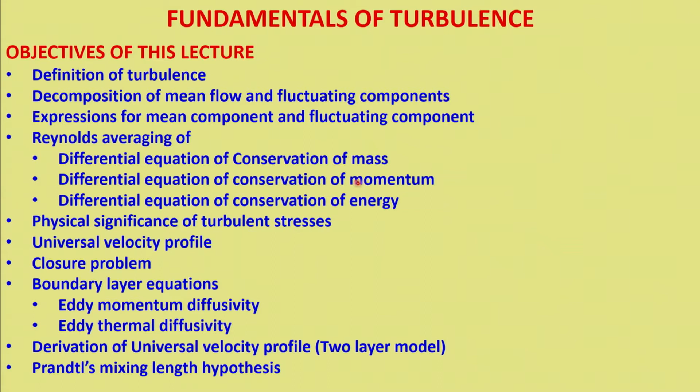Hello everyone. Yesterday we had just started off with the definition of turbulence, decomposition of mean flow and fluctuating components. Expressions for mean flow and fluctuating components were given, and we had Reynolds averaged the conservation of mass and momentum. So today we will do conservation of energy.

Before I do that, let's just take a quick look at these governing equations which had no simplifications, that is conservation of mass, 3 momentum equations and 1 energy equation.

The left hand side is the inertia force, this is the pressure force, these are the viscous forces, and Fx is the body force. So du by dt is the total acceleration, that is del u by del t plus u del u by del x plus v del u by del y plus w del u by del z. Now if I take incompressible flow, this term, that is mu by 3 times del u by del x plus del v by del y plus del w by del z, will become 0.

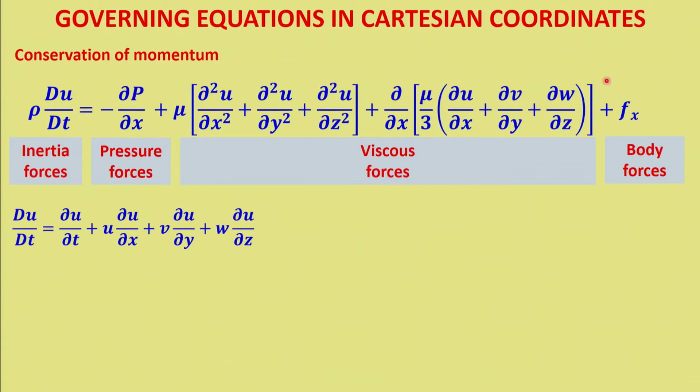So then this is the conservation of energy. You have the total derivative of temperature on the left hand side, which is the convection term, and then the conduction term, pressure work and viscous dissipation. Pressure work and viscous dissipation get neglected if we consider incompressible flow. So we end up with only rho Cp dT/dt equal to k times del square T by del x squared plus del square T by del y squared plus del square T by del z squared.

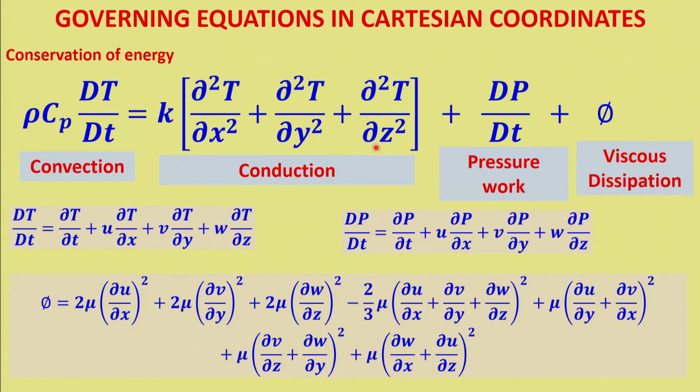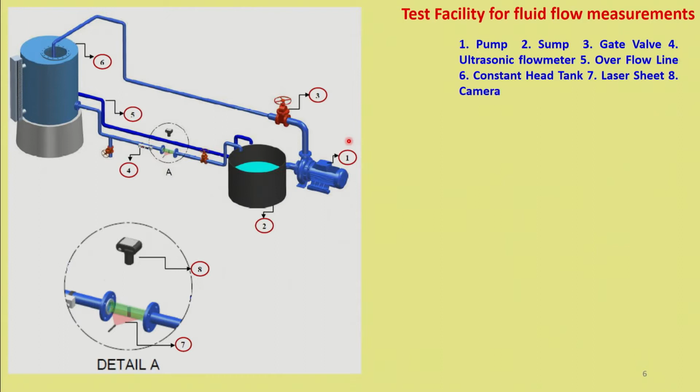So we said, okay, this is the Reynolds experiment where 2100 is the critical Reynolds number, and I showed you the video about the dissipation of the eddies downstream a circular cylinder and the trapezoidal cylinder, and I gave you the desirable situations of turbulent and laminar flow.

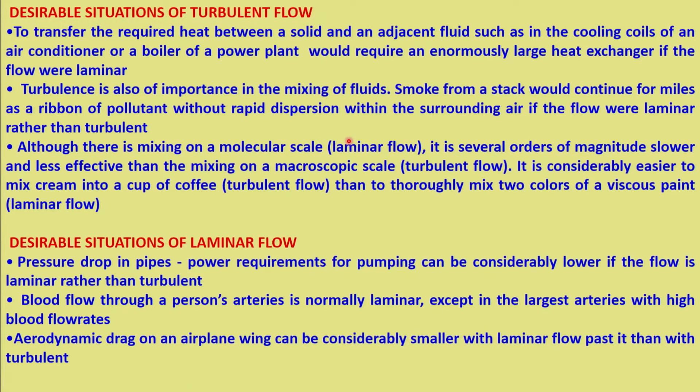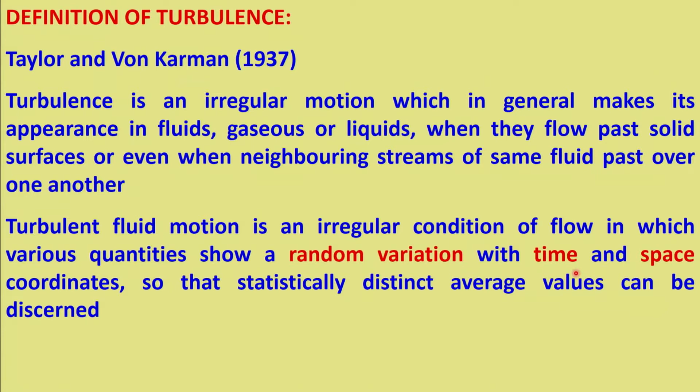This was the definition of turbulence given by Taylor and von Karman, which said that turbulent motion can be considered as an irregular condition of flow in which various quantities show a random variation with time and space, which enables us to give statistically distinct average values.

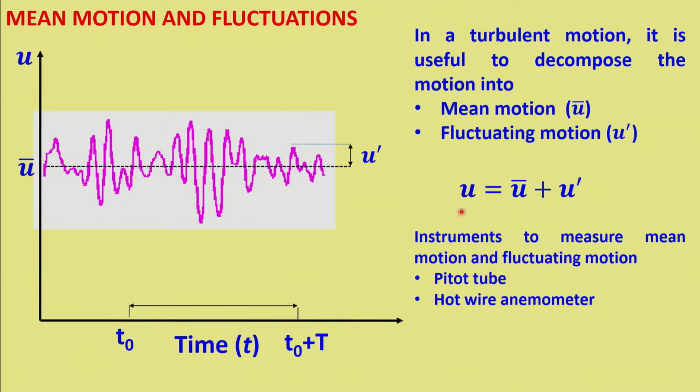So then we decomposed the motion into mean motion and fluctuating motion, that is u equal to u bar plus u prime, and u bar definition is 1 by T integral of u dt within the limits t naught to t naught plus T. We found that u prime bar is equal to 0, so it doesn't help us. So we defined, to quantify the fluctuating component, we squared it and then averaged it, that is u prime squared bar. It is kind of a standard deviation if I have to tell you.

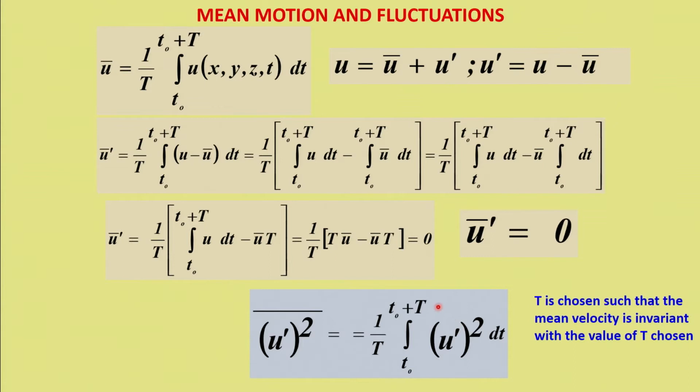So u prime squared bar exists, and then we define turbulence intensity as the square root of u prime squared bar upon u bar into 100, that is the turbulence intensity, and we derived relations for u and v, and these were the rules which were stated without derivations.

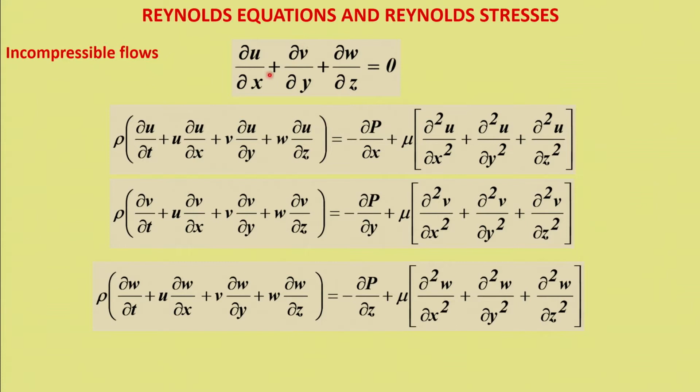We took the incompressible flow continuity equation and the x momentum equation, and we time averaged the continuity equation. We got del u bar by del x plus del v bar by del y plus del w bar by del z equal to 0, and then we did the Reynolds averaging of the momentum equation by rearranging this equation.

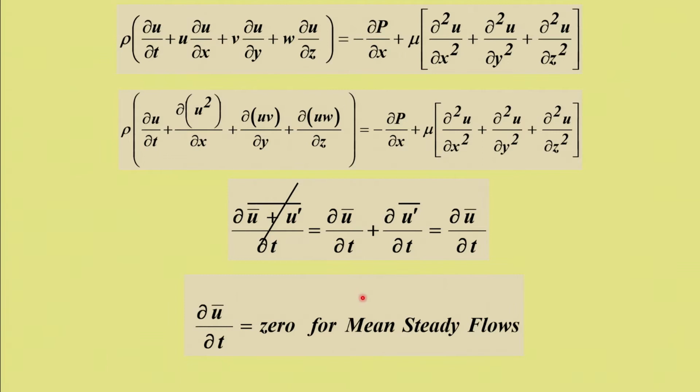We got that del u bar by del t equal to 0 because we are considering mean steady flow, and then we Reynolds averaged term by term, that is we took del u squared bar by del x, del uv bar by del y and del uw bar by del z, and we found that we got extra terms, that is del u prime squared bar by del x, del u prime v prime bar by del y and del u prime w prime bar by del z.

Similarly for pressure we got del p bar by del x, and for viscous terms mu del squared u bar by del x squared, del squared u bar by del y squared, del squared u bar by del z squared. So similarly we extended this for the x, y and z momentum equations. So you have these additional terms, we pushed them to the right hand side.

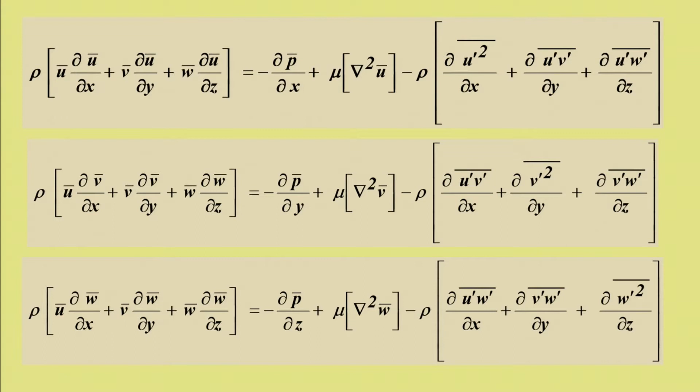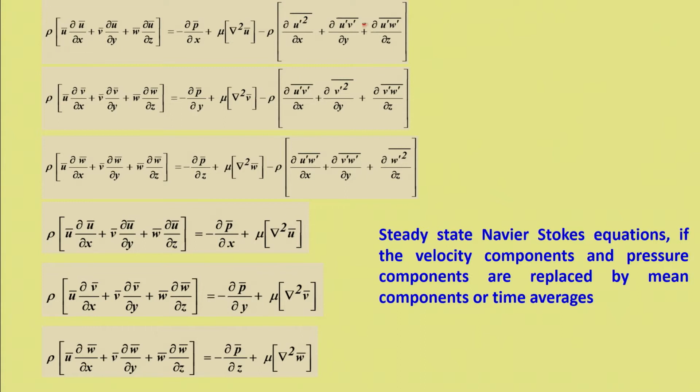These 9 additional terms can be visualized as the extra normal and shear stresses. So these are the equations which you get by Reynolds averaging. Without Reynolds averaging, these were the terms we had.

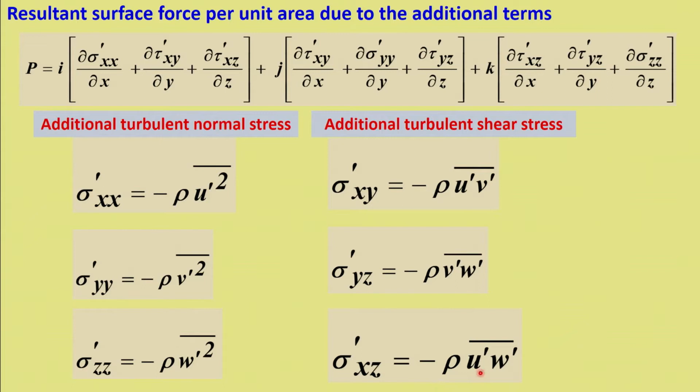These stresses are the 3 normal stresses, that is minus rho u prime squared bar, minus rho v prime squared bar, minus rho w prime squared bar, and shear stresses as minus rho u prime v prime bar, minus rho v prime w prime bar, minus rho u prime w prime bar. So then these are the additional stresses which are called Reynolds stresses.

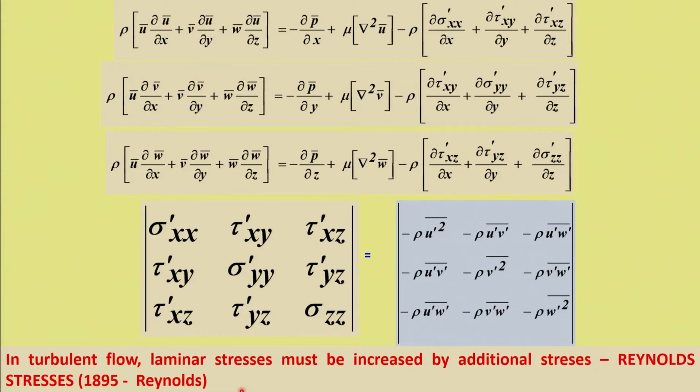So although these stresses appear with a negative sign, positive u prime induces negative v prime, and positive v prime induces negative u prime. So you get tau xy actually as positive. So this is over and above our viscous shear stress, that is mu del u bar by del y.

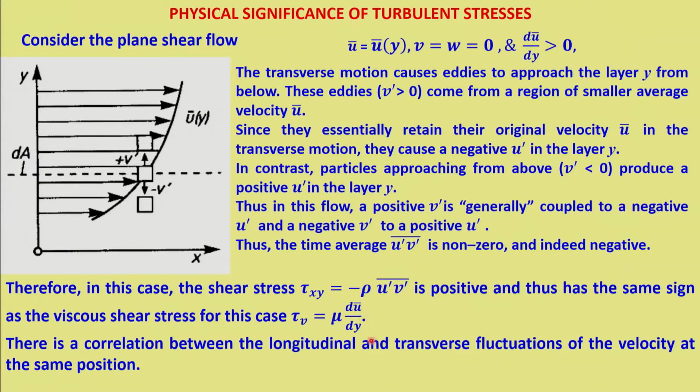So this was the physical significance of the turbulent stresses, and then we said that the total shear stress is equal to tau laminar plus tau turbulent, that is mu del u by del y minus rho u prime v prime bar. So in laminar boundary layer, minus rho u prime v prime bar is 0 because u prime is 0 and v prime is 0.

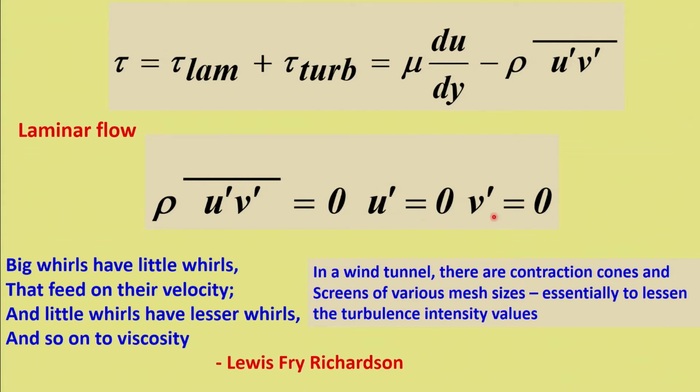So then we introduced a universal velocity profile, and we said that there are 3 layers: viscous sublayer, overlap layer, and outer layer. This is the flow in a pipe. In the viscous sublayer, laminar shear stress is larger than turbulent shear stress; in the overlap layer, both laminar and turbulent shear stresses are of the same order; and in the turbulent layer, laminar shear stress is lower than turbulent shear stress.

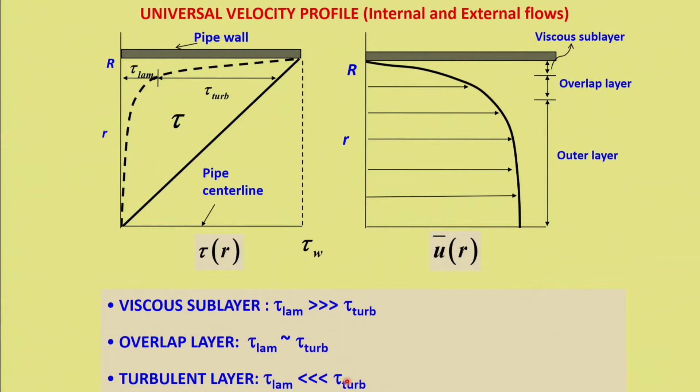So then we said the viscous sublayer can be represented with u plus equal to y plus, less than 5, and overlap layer u plus equal to 5 log of y plus minus 3.05, for y plus between 5 to 30, and turbulent layer is u plus equal to 2.5 log of y plus plus 5.5 for y plus greater than 30, and u plus is nothing but u by u tau.

U tau is frictional velocity. We showed yesterday that the unit of u tau reduces to meters per second, and y plus is y u tau by nu. We showed that this is non-dimensional. So this is called universal velocity profile.

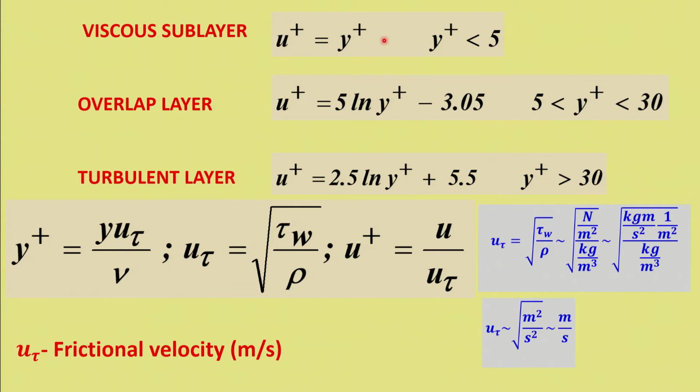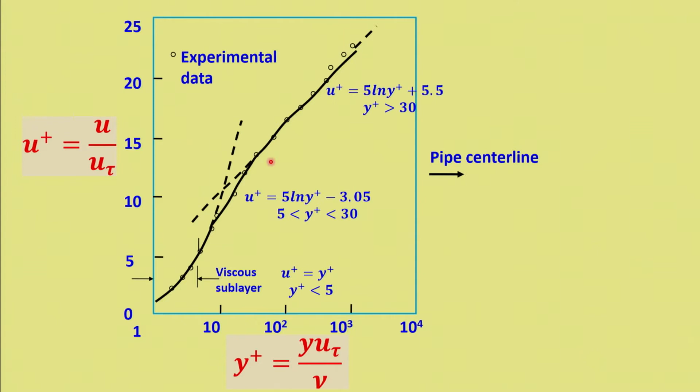Why is it called universal? Because it is valid not just for external flows but also for internal flows. However, it is not valid for jet flows. We need to remember that this is only valid for internal and external flows, so this is kind of semi-empirical. If you compare the viscous sublayer, the buffer layer, and the turbulent layer, they are all matching with the experimental data. Today in one of the modules we are going to derive this u plus, or the universal velocity profile.

So now let us do the time averaging of the energy equation.

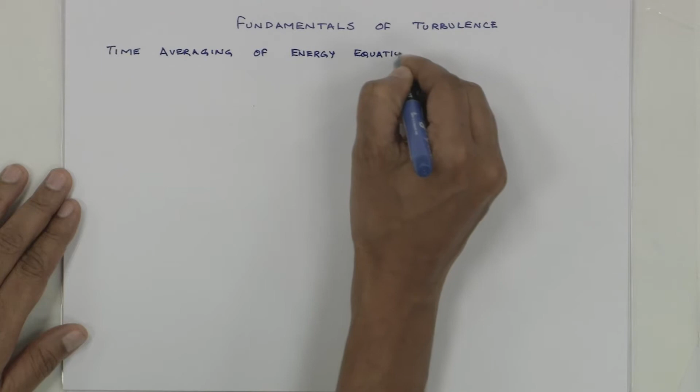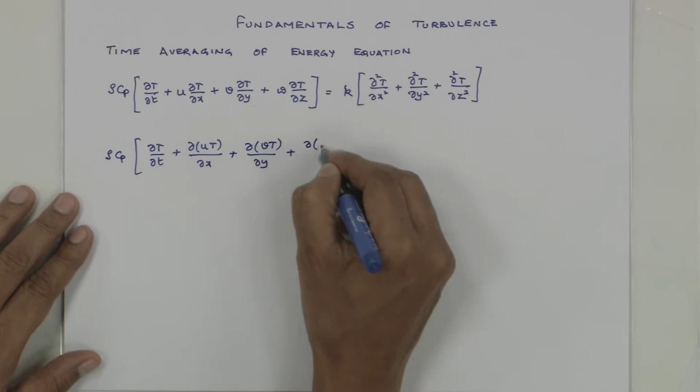So I am having only the total derivative of temperature and the conduction term. Let us write rho Cp del T by del t plus U del T by del X plus V del T by del Y plus W del T by del Z is equal to K into del squared T by del X squared plus del squared T by del Y squared plus del squared T by del Z squared.

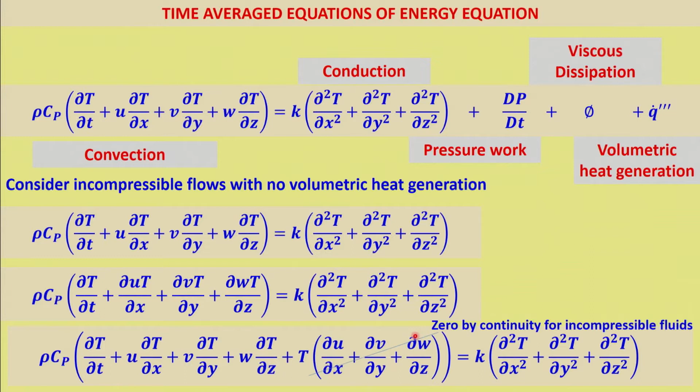Like we did in the momentum equation, we shall rearrange the left hand side so that time averaging becomes easy. So rho Cp del t by del t plus del of ut by del x plus del of vt by del y plus del of wt by del z is equal to k del squared t by del x squared plus del squared t by del y squared plus del squared t by del z squared. If I show the slides and expand this, you get the total derivative of t, plus t times del u by del x plus del v by del y plus del w by del z. This term gets 0 by continuity, because we are considering incompressible flow. So this is the same as what we have written at the top.

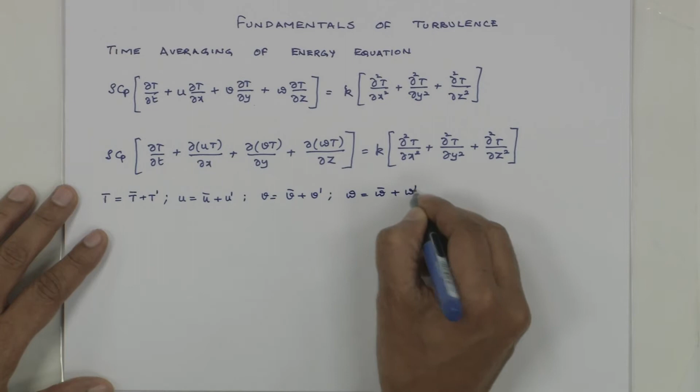So let us take up each term and see how it gets time averaged. First term: del of t bar plus t prime bar by del t equal to del t bar by del t plus del t prime bar by del t. This second term is 0, because t prime bar equals 0. So you get del t bar by del t.

Now the next term: del of u bar plus u prime times t bar plus t prime bar, upon del x. So you get del of u bar t bar plus u prime t bar plus t prime u bar plus u prime t prime bar, upon del x.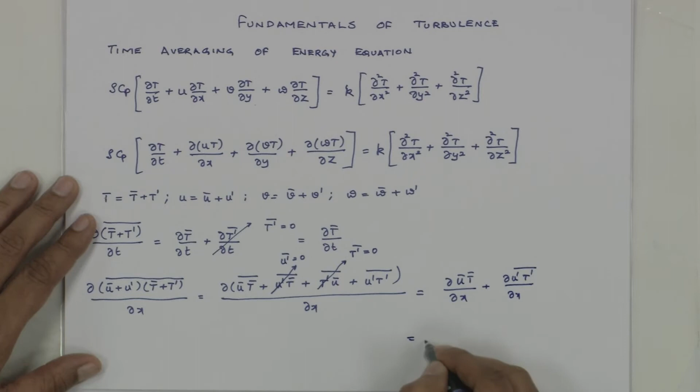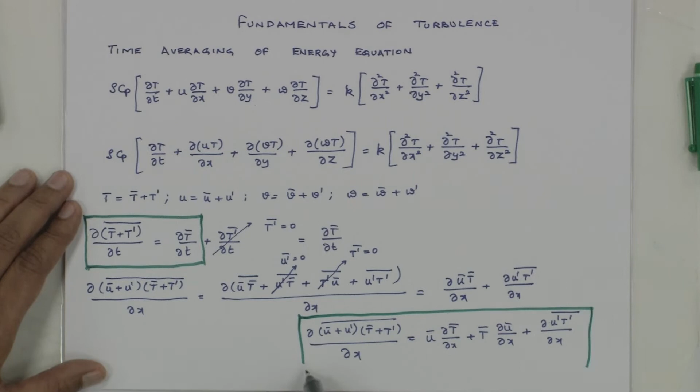As shown yesterday, this term will be 0 because u prime bar is 0, and this term will be 0 because t prime bar is 0. So you get del of u bar t bar upon del x plus del of u prime t prime bar upon del x, that is nothing but u bar del t bar by del x plus t bar del u bar by del x plus del u prime t prime bar upon del x. This is del u bar plus u prime t bar plus t prime bar upon del x. So I have found del of t bar plus t prime as this first term, and this is my second term. Now let us take up the third term.

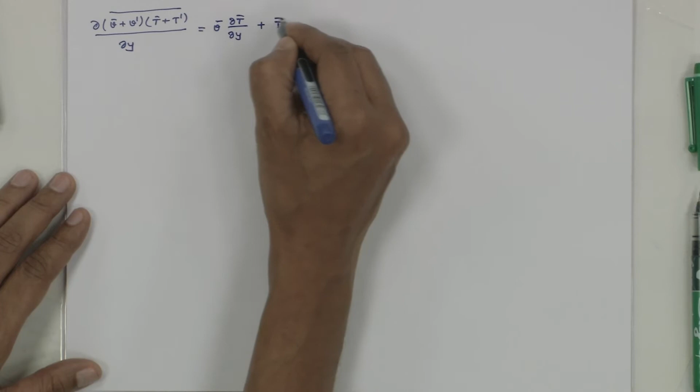Third term I can directly write, that is del of v bar plus v prime into t bar plus t prime bar upon del y, equal to v bar del t bar by del y plus t bar del v bar by del y plus del of v prime t prime bar upon del y.

Del of next term w bar plus w prime t bar plus t prime bar upon del y is equal to w bar del t bar by del y plus t bar del w bar by del y plus del w prime t prime bar by del z, this is not del y, this is del z, del z, del z.

Now the right hand terms, you have del squared t bar plus t prime bar by del x squared, you get del squared t bar by del x squared plus del squared t prime bar by del x squared. This is 0 because t prime bar is 0. So you end up getting del squared t bar plus t prime is equal to del squared t bar by del x squared.

Similarly, del squared t bar plus t prime bar by del y squared equal to del squared t bar by del y squared, and del squared t bar plus t prime bar upon del z squared is equal to del squared t bar by del z squared.

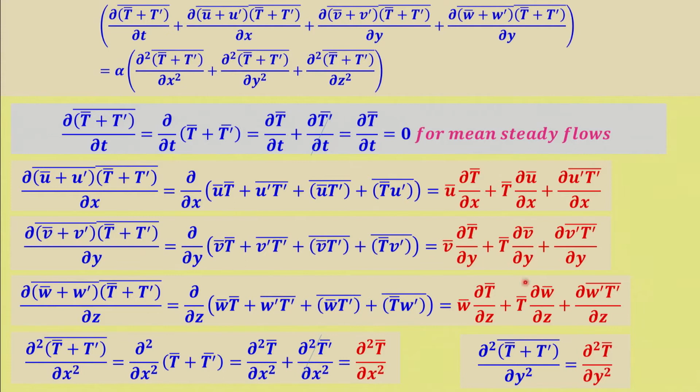So just if you see the slides here for a minute, back to slides, each term I have written here, each of these terms I have expanded and written.

If we substitute all of this into my energy equation, I get rho Cp into del T bar by del T plus U bar del T bar by del X plus T bar del U bar by del X.

I am taking T bar common and write del U bar by del X plus del of U prime T prime bar upon del X plus V bar del T bar by del Y plus T bar del V bar by del Y plus del V prime T prime bar by del Y plus W bar del T bar by del Z plus T bar del W bar by del Z plus del by del Z of W prime T prime bar.

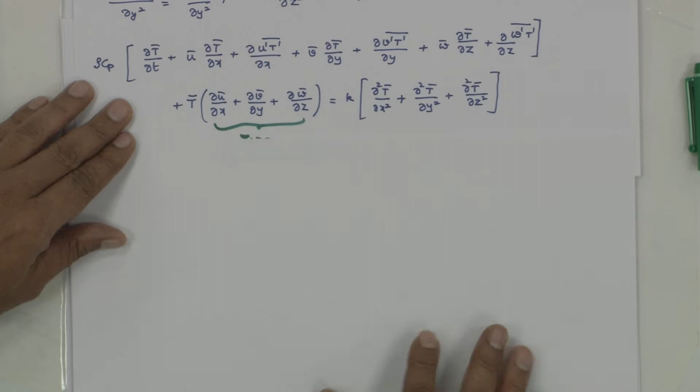I will push all these turbulence parameters to the right hand side like I did in the momentum equation. So U bar del T bar by del, and also I am considering mean steady flow. So for mean steady flow, del T bar by del T is 0. So I can neglect this and I will push this rho Cp to the right hand side.

So I get U bar del T bar by del X plus V bar del T bar by del Y plus W bar del T bar by del Z is equal to alpha del squared T bar by del X squared plus del squared T bar by del Y squared plus del squared T bar by del Z squared.

Minus, because I am pushing this to the right hand side, if I take minus as common, del U prime T prime bar by del X plus del V prime T prime bar by del Y plus del of W prime T prime bar by del Z.

You see, these were the terms earlier which were there, but now this is the additional stresses. You can think of additional stresses which are going to aid, like turbulent shear stress. These are going to get additional heat flux. They are going to contribute for additional heat flux.

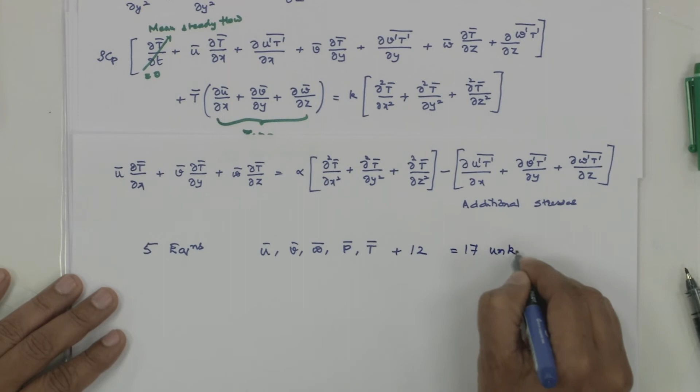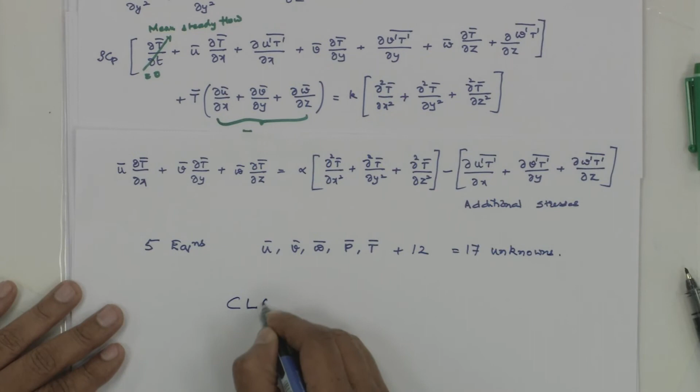Fortunately, the gap between the equations and the unknowns is not so menacing, because if we consider a few simple flow configurations, such as boundary layers and fully developed flow through straight ducts, we can get slightly closed form solutions.

So what we shall do now is write the boundary layer equations. If I take the continuity equation in the boundary layer, let us write down the boundary layer equations. So the next topic we are starting is boundary layer equations.

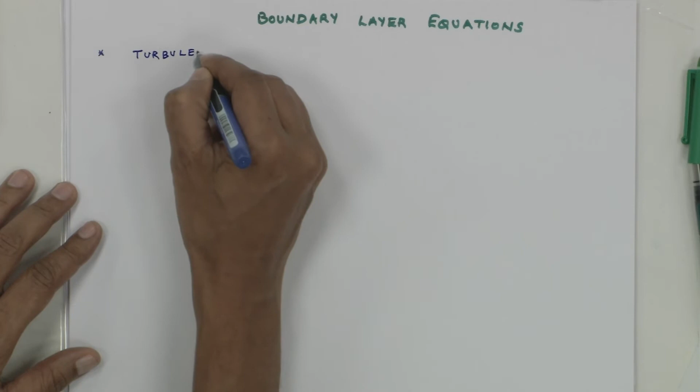In these boundary layer equations, what we are considering is turbulent flow near a wall parallel to a free stream u infinity and t infinity, oriented in the positive x direction, that is flow over a flat plate. So we are considering turbulent flow with velocity u infinity, t infinity in the positive x direction.

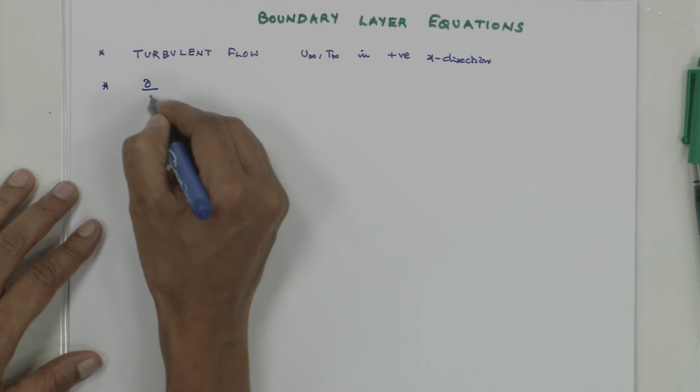Now, although the actual turbulent flow is 3-dimensional, from symmetry, the terms representing del by del z vanish and do not exist.

Next, as in laminar flow, the y momentum equation is neglected. We have argued this during the boundary layer equations in laminar flow. If you have doubts, please revisit those modules and convince yourself why the y momentum equation is neglected. And z momentum does not exist. So with this, what do we get?

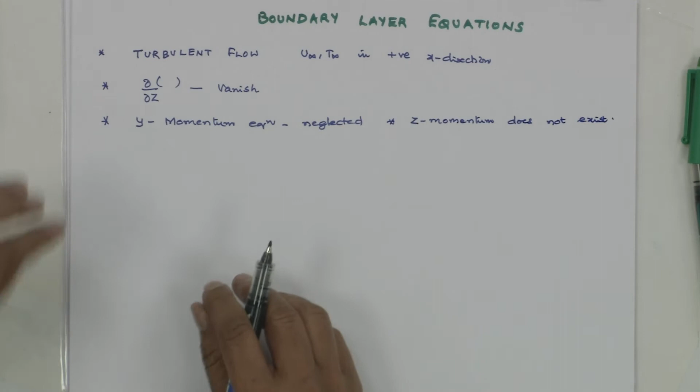The continuity equation would be del u bar by del x plus del v bar by del y equal to 0. That is my continuity equation.

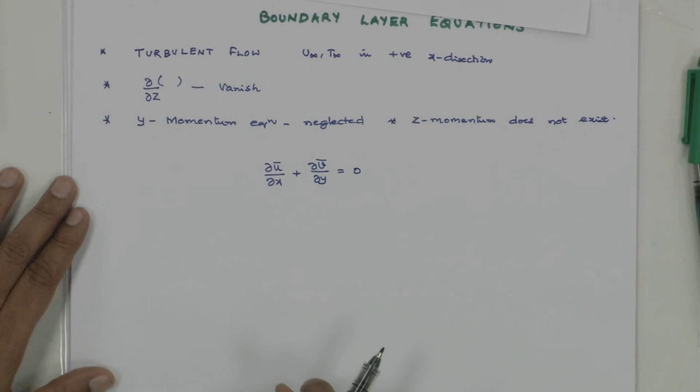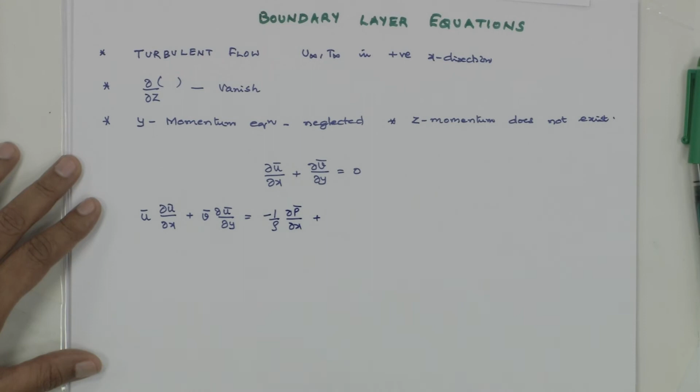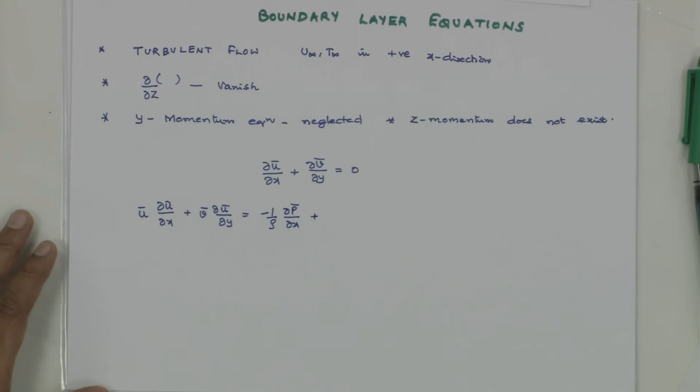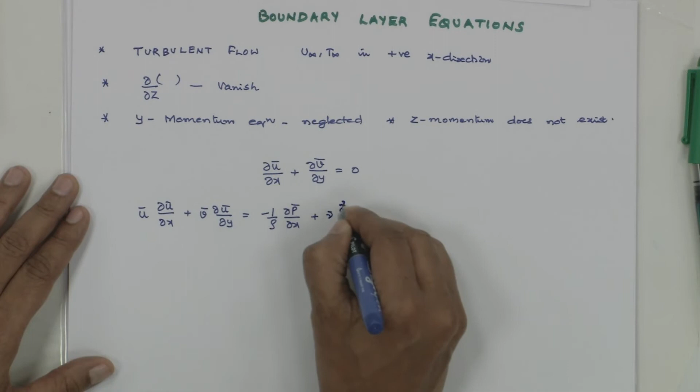Now, if we take the momentum equation which we derived, going back to the previous slide, here you see w bar is not there and the del by del z term is not there. So you get u bar del u bar by del x plus v bar del u bar by del y equal to minus 1 by rho del p bar by del x, plus, among the viscous terms x and z, z doesn't exist, and the scale of x is greater than the scale of y, so you get only nu del squared u bar by del y squared. This we have done in boundary layer equations.

Similarly, we say that del u prime v prime bar upon del y is greater than del u prime squared bar by del x. The del by del z term is not there. So I get only plus minus del of u prime v prime bar upon del y.

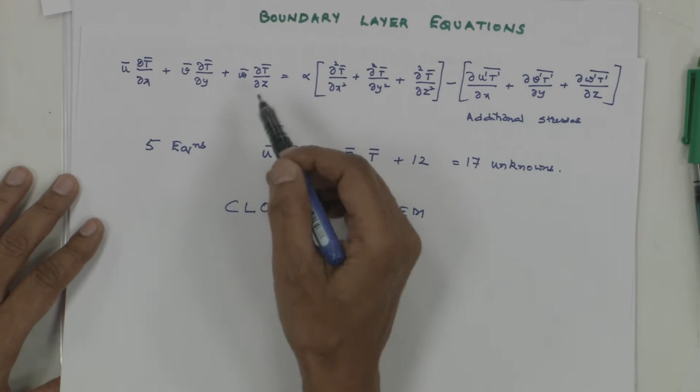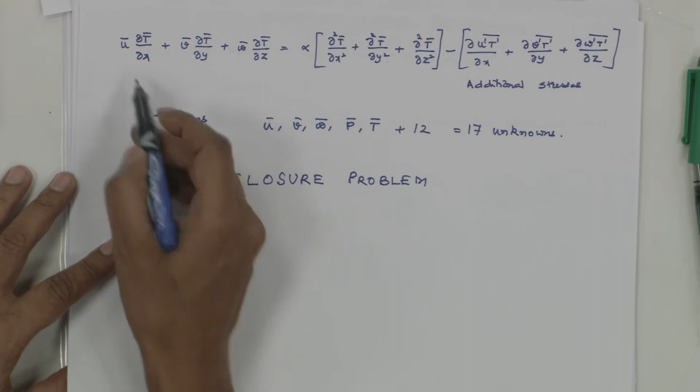Now let us take up the energy equation. This is what we had written, the time-averaged energy equation. Here W bar doesn't exist and del T bar by del Z doesn't exist. So on the left hand side you have only U bar del T bar by del X plus V bar del T bar by del Y. Let's write that: U bar del T bar by del X plus V bar del T bar by del Y

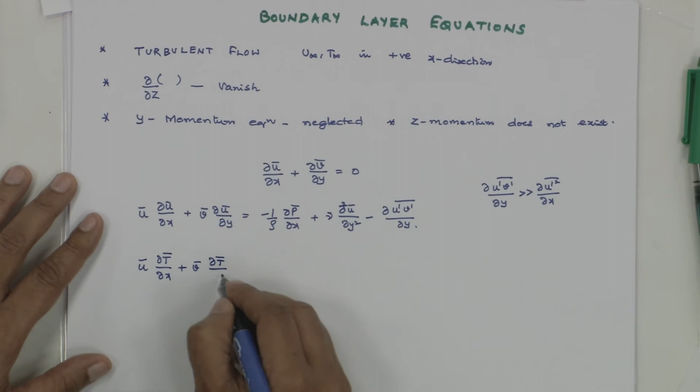is equal to alpha del squared T bar by del X squared plus alpha del squared T bar by del Y squared. You see, X is of the scale of L and Y is of the scale of delta, this is what we had taken. So delta T is very much smaller than L, so this term will vanish and only this term will remain, and the del by del Z term anyway is not there.

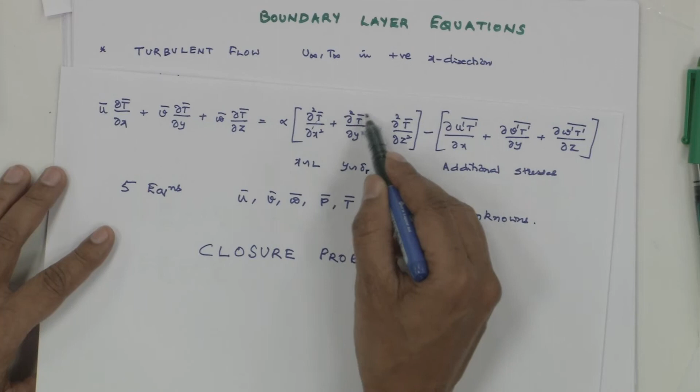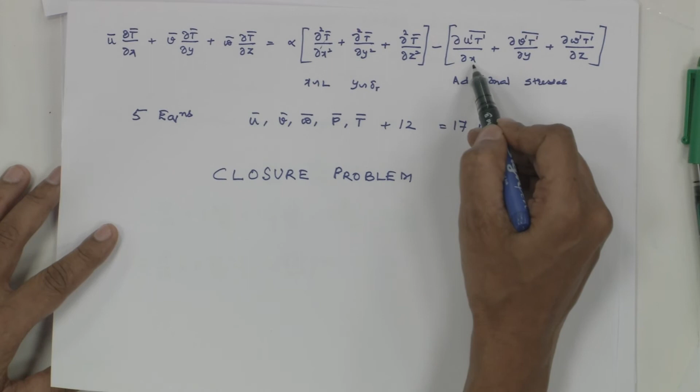So you have alpha del squared T bar by del Y squared minus of, now we have three terms. Out of these three terms, del by del Z term is not there. Out of these two terms, this is smaller than this, that is del of U prime T prime bar upon del X is less than del of V prime T prime bar upon del Y. So I will be left out with only del of V prime T prime bar upon del Y.

Okay, so if I get back to slides, these are the three equations which I have gotten, and these we are writing as our boundary layer equations.

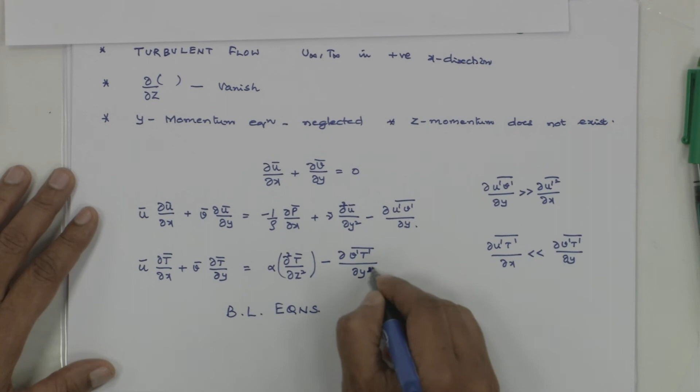Yes, del Y squared. There is a typo here, please correct it. This is, sorry, this is del Y, this is del Y squared. This is correct. If you get to the slides, what I have written here is wrong. So here this is del squared T bar by del Y squared minus del V prime T prime bar by del Y.

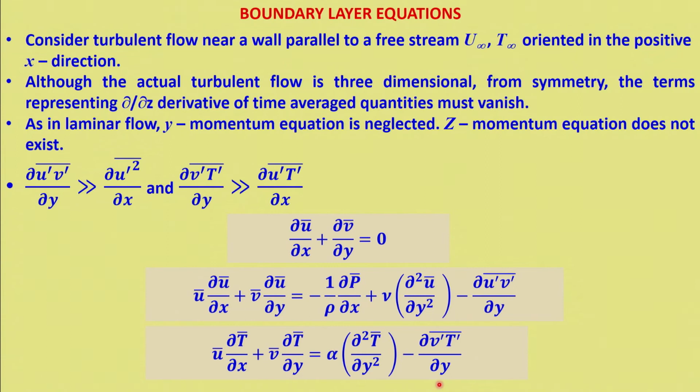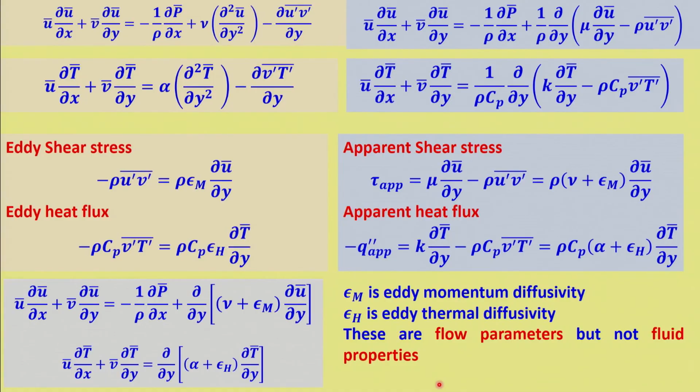Now I am going to introduce something called eddy diffusivity, momentum and thermal diffusivity. Let us write these equations a little differently.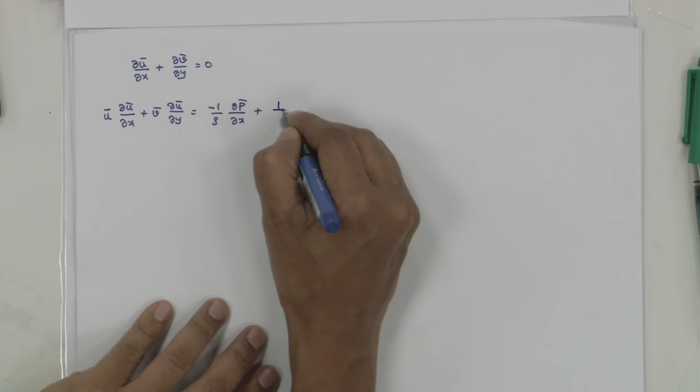So I will focus only on, let's write del U bar by del X plus del V bar by del Y equal to 0, continuity is over. The momentum is U bar del U bar by del X plus V bar del U bar by del Y equal to minus of 1 by rho del P bar by del X plus, you see in this equation what I am doing is, I am taking 1 by rho del by del Y of, I am writing. So 1 by rho del by del Y into mu del U bar by del Y minus of rho U prime V prime bar.

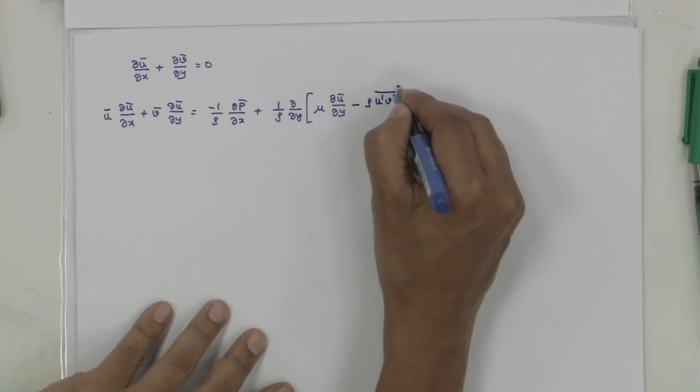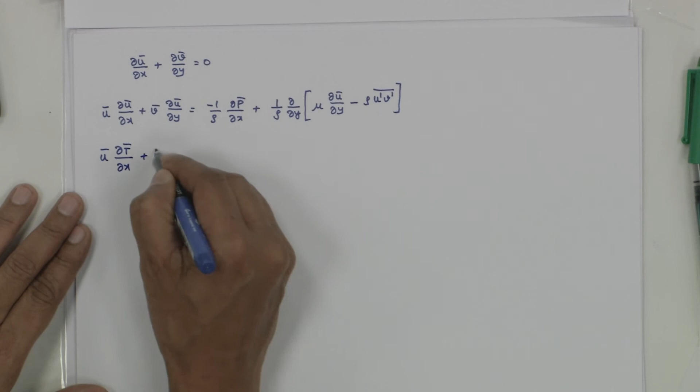Similarly, the energy equation, U bar del T bar by del X plus V bar del T bar by del Y is equal to 1 by rho Cp del by del Y of K del T bar by del Y minus rho Cp V prime T prime bar.

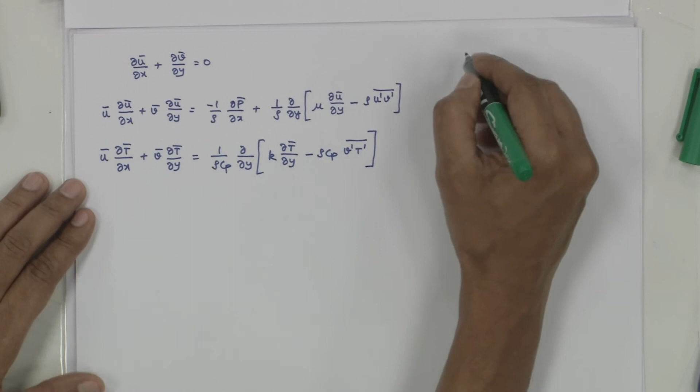Now I define what is called eddy shear stress, that is minus rho U prime V prime bar. You see here mu del U bar del Y is a shear stress. So minus rho U prime V prime bar, I am calling it as one more shear stress, that is eddy shear stress, which is equal to rho epsilon m del U bar by del Y, where epsilon m is eddy momentum diffusivity. This is a bold assumption.

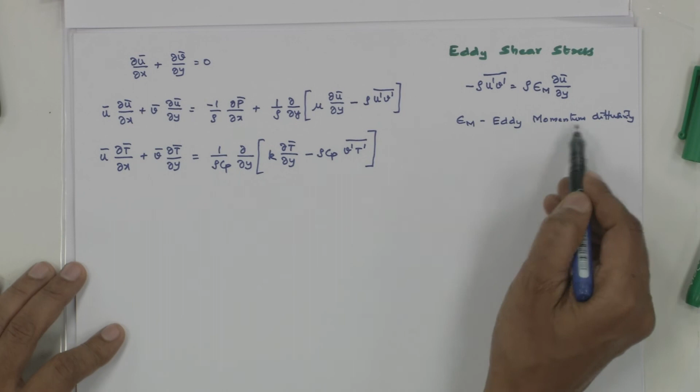Why do I call this as bold? Because the fluctuating components we are representing in terms of the mean components, and defining one more diffusivity, that is nu as kinematic viscosity is a momentum diffusivity. See, here also we are defining as turbulent momentum diffusivity or eddy momentum diffusivity, that is epsilon m.

So now we can define eddy heat flux. Let's write eddy heat flux, that is minus rho Cp V prime T prime bar is equal to rho Cp epsilon H del T bar by del Y, where epsilon H is eddy thermal diffusivity.

If I substitute this in these equations, so what do I get? Del U bar by del X plus del V bar by del Y equal to 0, and U bar del U bar by del X plus V bar del U bar by del Y equal to minus 1 by rho del P bar by del X plus del by del Y. I am pushing rho inside, so I get nu plus epsilon m into del U bar by del Y.

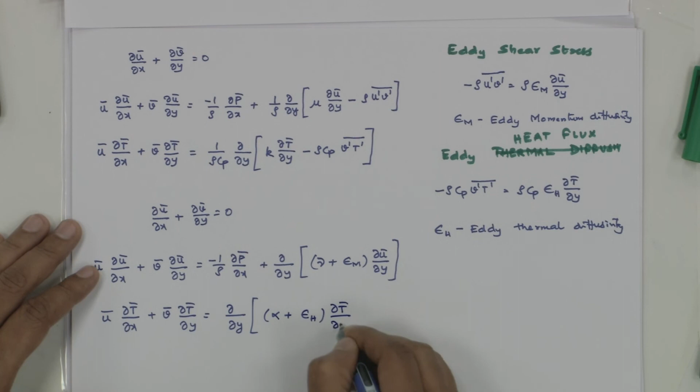And similarly, energy equation, U bar del T bar by del X plus V bar del T bar by del Y is equal to del by del Y of, rho Cp I am pushing inside, so I get alpha plus epsilon H del T bar by del Y.

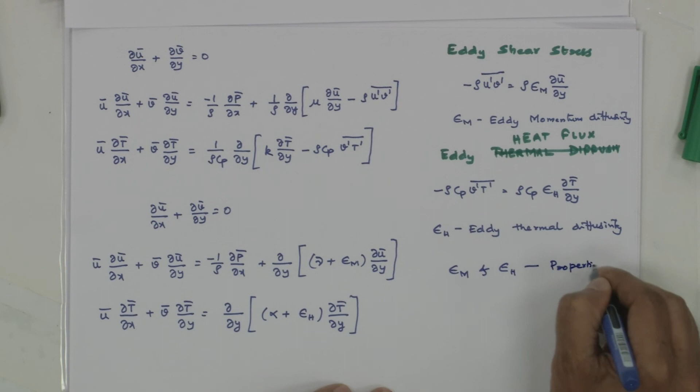Remember, epsilon m and epsilon H, unlike nu and alpha, are not properties of fluid but properties of flow. Nu and alpha were properties of fluid, that is the major difference. Flow means whether it depends on internal flow or external flow, it depends on that. So this epsilon m, we will come to how do we get these values of epsilon m and epsilon H.

So if I come back to slides, these are the equations which I had, and now if you see, my life has not become any better, because what are the unknowns still? I have U bar, V bar, P bar, T bar, epsilon m, epsilon H. So I have 6 unknowns, and equations are still 3 only.

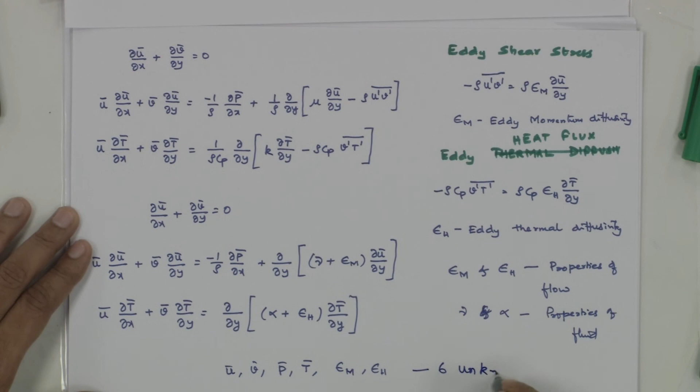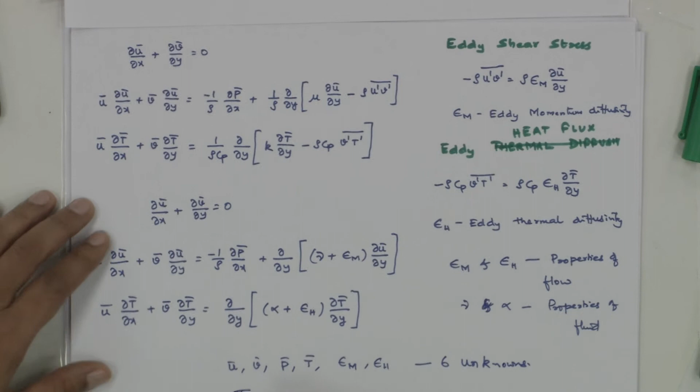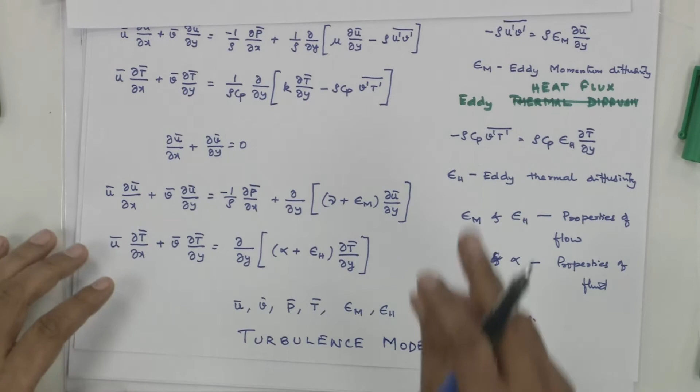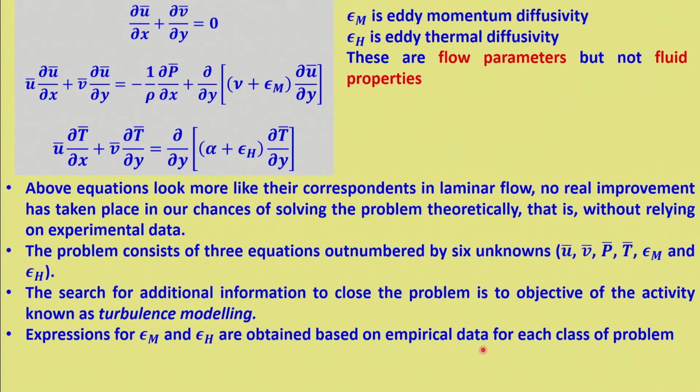Okay, so how to close these equations is what is termed as turbulence modeling. So this is epsilon m and epsilon H. Epsilon m and epsilon H are based on the empirical data. So this is where we will stop and continue this in the next module.